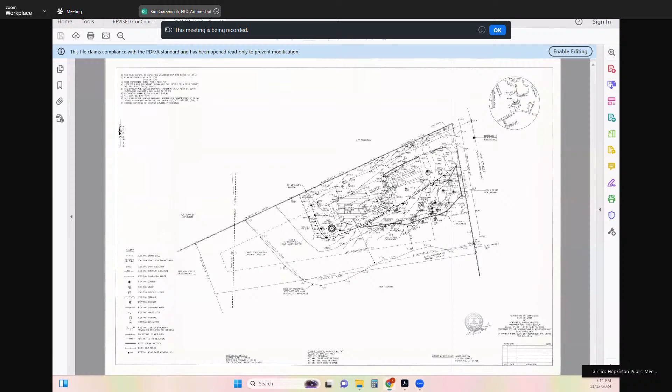Excellent. What's the process moving forward? I have to file something with the registry of deeds.

Through the chair. Yep, go ahead, Anna. So in two weeks at the next meeting, the commission will review the document, authorize signature, and then I will email you the directions. Okay, thank you. You're welcome.

Next up, we have Toll Brothers, Elmwood Farm, Newbury Glen, discussion on condition number 69.

We have someone here, oh, we have someone here from Toll Brothers. Yes, Rich Kirby from LEC is here. I believe Ted Merchant may be on the line. Ted, you still there? Maybe not. I know he had another hearing tonight. He might have had to jump off.

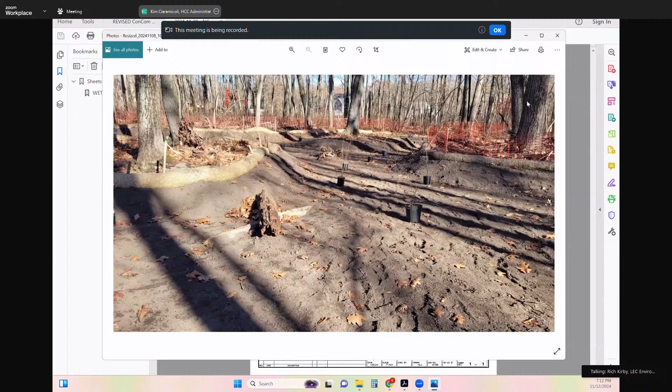Okay, so I'm Rich Kirby from LEC, and Toll Brothers hired us to oversee and monitor the installation of the wetland replication area that was approved by the commission for the Newbury Glen subdivision off of Blueberry Lane in Hopkinton. The wetland replication area was approved to be a 7,800 square foot expansion of an isolated wetland within the southern portion of the site. LEC's been working with the site contractor and the landscape contractor to get this installed this fall.

We were out there a number of times between the end of October and the first part of November to oversee the layout of the wetland replication area.

We modified it slightly to preserve some large trees that didn't quite make it onto the previous plan. Ran that by Kim in a discussion and followed up with a memo, basically just overviewing.

We're gonna keep the trees in this area and expand the replication area elsewhere. That memo talked about 3 trees, and over the course of the installation, we found 2 more that we could also preserve. I'll get into the methods briefly for a moment.

But as it turns out, we are well over the 7,800 with nearly 8,500 square feet, while preserving 5 large trees as a result of the reconfiguration. So all of this is outlined in a memorandum that I produced tonight, but basically the order of conditions and the approved plan specified that we use the soils within the wetland alteration area for the wetland replication area.

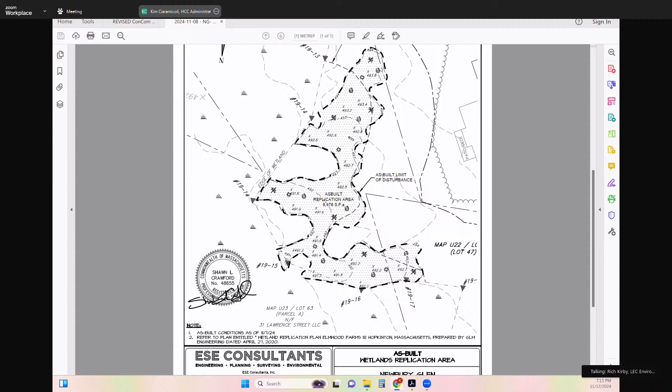The topsoil was then backfilled within the area to a depth of 12 inches, and the plants were installed.

All the plants specified on the plan were delivered. Some were a little smaller than specified, but in my experience it can be challenging to obtain native plant stock in that size. Most were pretty good, but there were arrowwood viburnums between 6 and 12 inches tall coming out of the pot, so we rejected those, and the landscape contractor got replacement shrubs that were appropriately sized.

This is a photograph of some of the staging that we did of the plants. At this point, all the plants are installed.

The buffer zone seed mixture for the access road has been installed. The only thing that remains is the wetland seed mix and some straw to stabilize the soil over the winter and early spring months. That wetland seed mix was ordered for FedEx delivery tomorrow, and the seed mix and straw will be applied tomorrow. That's my understanding, so that's where we stand.

We know the order of conditions requires that the wetland replication area be installed prior to the issuance of any building permits. We are 99% there, and we'll be 100% there tomorrow after the landscaper applies the wetland seed. That's all overviewed in a memorandum that we submitted this afternoon, and I wanted to go over it with the commission.

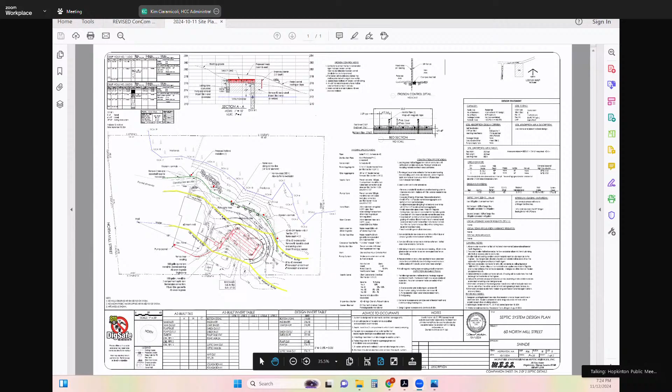All right. Dan McIntyre is here representing the homeowner. Hi, Dan. Welcome. Do you want to give us a breakdown here? So this lot was developed back in 1985. The current system is starting to surcharge to the ground and needs to be replaced.

So to orientate you, North Mill Street is over on the left-hand side. There's a well in the front yard. The existing septic system is in the backyard. There's a septic tank right here and some leaching trenches going through the backyard. We had wetlands delineated by Goddard Consulting, which takes up quite a bit of the lot over here. So just about the entire lot is within the buffer zone.

The only practical place to replace the septic system is right back where it is now. So we're proposing to take out the existing system, put in a new system, new septic tank. And because of the groundwater conditions, we're mounding the backyard up a little bit, so we're going to need a pump tank to make this all work. We're mounding this up a couple feet and grading it back down within the existing lawn area. We're proposing to limit the grading and the lawn to some large rocks here and try to take back some of the lawn area that got close to the wetlands and turn that into a no-mow area.

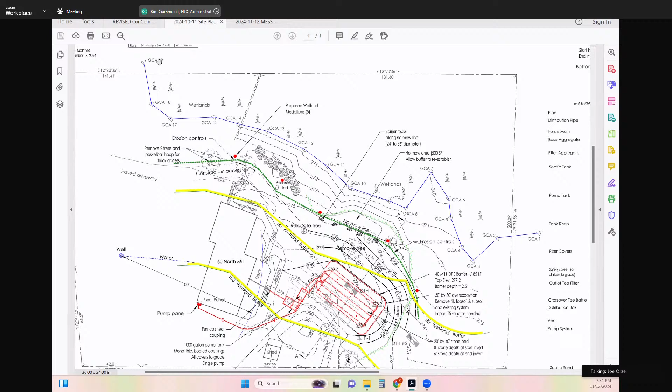Okay, I did review the delineation, didn't have any major concerns with it. As was described for the mitigation, they're proposing to allow about a 500 square foot area of existing lawn to revegetate naturally. I thought the Conservation Commission might want to discuss if some plantings would be appropriate in that area, considering that they are cutting down a couple of trees.

I had asked about any soil stockpile locations, and the response was that they don't anticipate any significant stockpiles. And other than that, no real issues.

So this is an RDA application, so we're looking to consider whether we agree this falls under an RDA. I personally like your suggestion, Joe, for replanting a couple trees in that no-mow area to establish a bit more of a buffer zone. Dan, do you know if the applicant would be amenable to that?

Well, I did talk to him. We really don't think trees are appropriate. If you look at the plan, there are still two mature trees. We've got a wetland medallion going to be attached to one of them, and there's another tree here that provides really good overstory of that no-mow area.

And if you went on site and looked at it close, it's more of a mossy area than a lawn area, so it doesn't get much sunlight in there. So I think we've got plenty of tree canopy for the wetland down there. So we don't think trees are appropriate. Okay.

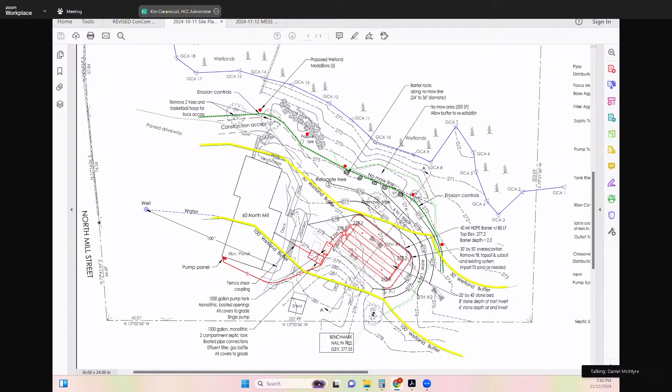All right, thank you. Through the chair, can we have a vote to continue to November 26th, please? Yes, can I get a motion for that? I'll make that motion. Can I get a second? Second. All in favor: Ed, aye. Ted, aye. Janine, aye. Matt, aye. Heather, aye. And I am an aye.

All right, next up we have Town of Hopkinton DPW, Granite Street right of way — another RDA application for wells. Let me go ahead and read this. Public hearing notice: the Hopkinton Conservation Commission will hold a public hearing on Tuesday, November 12th, 2024 at 7 p.m., virtually online, to hear all persons interested in a request for determination of applicability filed by Hopkinton DPW for exploratory geotechnical borings. Location: Granite Street right of way, between 4 Granite Street and 2 Deer Run.

All right, so do we have a representative here from DPW? Okay, members of the commission, good evening. My name is Lucas Rum of Tighe and Bond, and I'll be representing the DPW this evening.

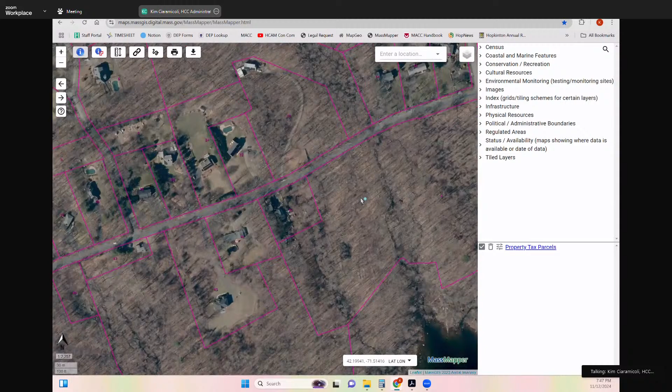This is the Milford Water Company site. So I'm just not sure what's around that's owned by the town that it could be discharged to, other than like the MS4 system, into the catch basin and the town stormwater system.

I'm wondering if it's just more appropriate to anticipate this water being released and just require something like a dirt bag, a corral and a dirt bag. I don't know if that's possible or if a vac truck is easier. It might end up that the vac truck is just the way to go, so I think maybe we'd be looking for confirmation of what you're going to use for discharge of wash water.

And like Kim said, if it's not the vac truck, then provide measures to, like Kim said, either a bag or in location. We can definitely accommodate that.

Through the chair, I'm sorry if I missed it earlier from Luke. Did we confirm whether it's 2 borings or 4 borings? I think there's some discrepancies between the application and the plan. There it is, 2 borings. So we proposed 4 locations on the plan, just so that when the crew goes to the field, they can decide the 2 best locations, but we are only conducting 2 borings. Thank you.

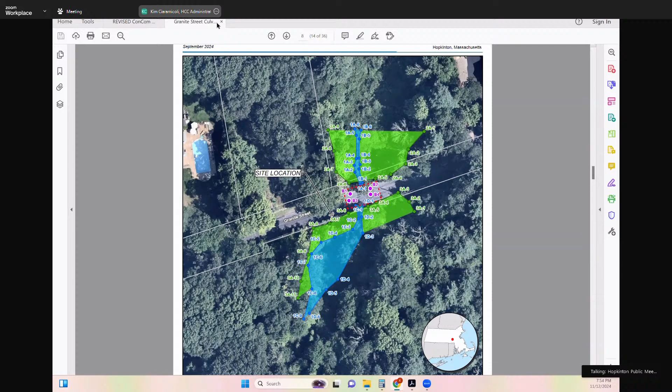All right, so we're all set on that. And moving on to our next new hearing, which is another RDA. I will go ahead and read the notice again. The Hopkinton Conservation Commission will hold a public hearing on Tuesday, November 12th, 2024 at 7 p.m. virtually online, for all persons interested in a request for determination of applicability filed by Jay Gallant to construct an accessible ramp with associated site work. Location is 71 West Main Street, Assessor Map R23, Block 80, Lot 0.

All right, do we have someone representing the applicant on the line? Yes. Great, would you like to go through the project or have Anna give a description? I could. So my name is Jay Gallant, I'm the applicant and the architect for the project, working for Mike Glatfelter, who's also here. I could walk through it if you'd like. Okay, yeah, let us know what you're looking to do.

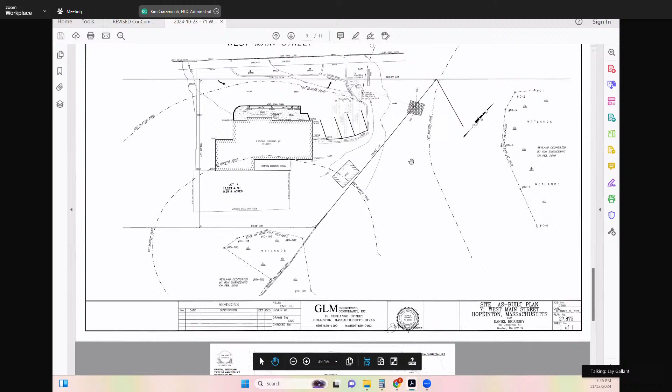Okay, so the property was a house when it was originally constructed, and it was converted to commercial use at some point. I don't know exactly when.

Clearly, it was a dry cleaner for a while because there's an awning sign that says cleaners. But it hasn't been in use for a while.

So my client, the current property owner, wants to open a bakery at the location. Basically the lower area where the awning is will be a takeout retail space, and then the rest of the building, which is higher, you can sort of see it there. It looks like it was a garage at one point where the retail space is going to be.

The majority of the house is where the kitchen itself is going to be, where the baking will be done. It's going to be a legitimate commercial kitchen, and it's about 30 inches higher in elevation than the floor level of the retail space. We're doing enough work to trigger full handicap compliance for the entire building.

There's, in the lower left-hand corner, a picture of the back of the house or the back of the building where there's a current staircase and a landing. We want to convert that into a handicap accessible ramp. The ramp would go to the right in that picture, to the corner of the building, through where the propane tanks are now, which will be relocated.

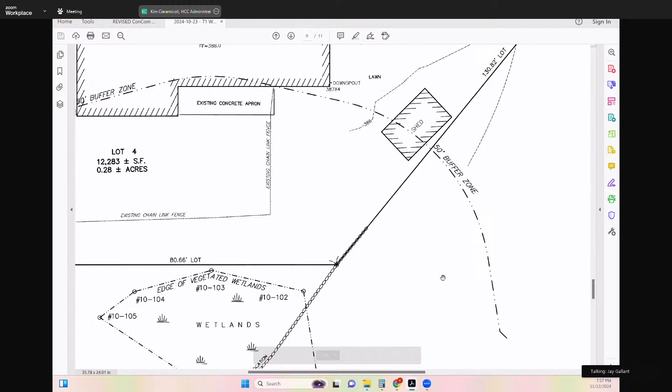And wrapping around to the parking area. So it'll help for access for any employees that may need to use it, and then also for deliveries. And it would free up the lower space, the retail space, for its highest and best use.

Unfortunately, for the construction of the ramp, there's a wetland directly behind the property, and you see the 50-foot buffer line there. The majority of the structure that we're proposing will be within that 50-foot zone. It is previously developed - you can see in the photograph, and in this drawing, that there's a concrete slab there, and we just want to essentially build on top of it.

So the pier foundation that we're proposing, the screw pile - the metal screw piles, Techno Metal Post is the most common local supplier and installer. You drill through the concrete and then drill through into the ground to set these posts, and there would be 5 of them, and then a landscape paver base and a landscape paver walkway.

So we're trying to limit the disturbance to negligible disturbance in order to create the ramp. And we're proposing straw wattle erosion control, as you can see.

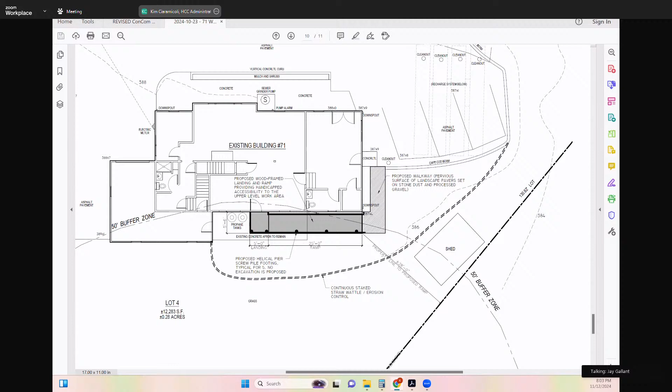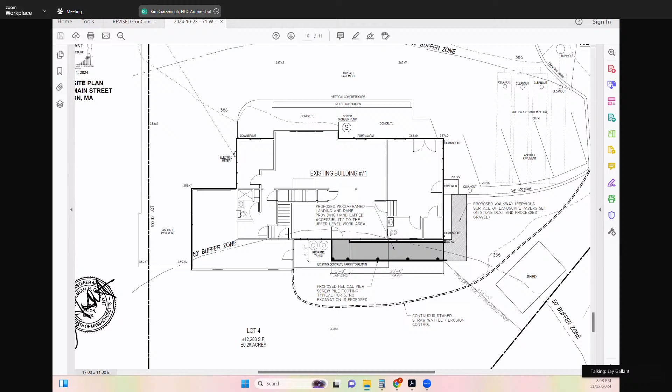Okay, I did a study and sent it over to Anna, but basically we could go around the garage, which is on the left, and still end up in the same place because we have to get access to that main area for it to be feasible. So essentially that would put us closer to the wetland because it would be along the back side of the garage. I think what we're proposing has less impact. And if it were in the front of the building, it wouldn't really make sense. We could also do inside the building, we could do some sort of lift.

So here goes the letter that I wrote. And then, we could do some sort of lift inside the building, but it kind of kills the space, as you can see. And then there's the ramp that I just mentioned, which would kind of wrap around and still end up in the same place because that's the door. But essentially you see the stairs in there. The layout of the interior of the space, the stairs take up quite a bit of space. We really don't have too many alternatives in terms of using the space differently or creating different entrances or anything like that.

And none of what we would propose would really help change the condition of having the space higher, first of all, and then the ramp that we're proposing seems to be the furthest away from the wetland and the stream and has very minimal impact. Mm-hmm. Okay.

All right, so I agree that it's a minor, seems a minimal minor impact proposal here with the piles and the ramp. I think the thing I'd like to discuss with the commission is whether this riverfront area issue would kick it into requiring a notice of intent. I believe, based on discussions I had with Anna, Kim, and Judy, that's something the commission would need to uphold and require for this project, because it is within 200 feet of the perennial stream. Again, this is the night of the gray area RDA applications, it seems like. Does anyone have thoughts on that, commission?

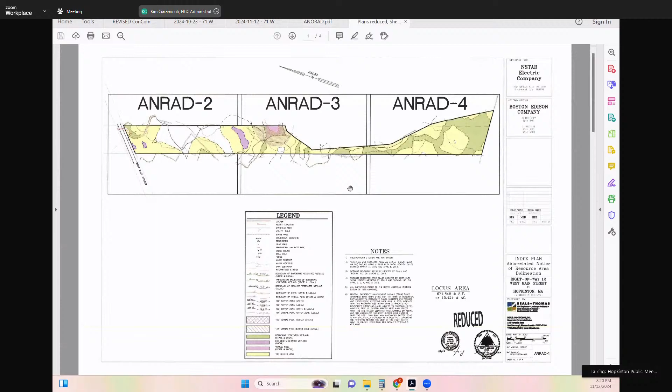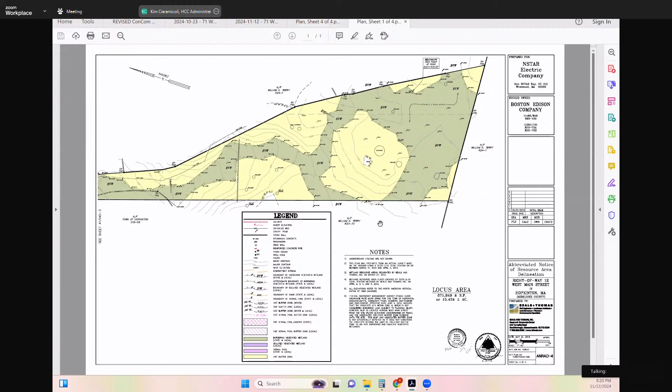If you'd like, we can hold off and continue to the next hearing if you'd like to gather a little more information. Anna's showing some documents here, it looks like, or maybe that's Kim. We might have some more information that we can go through and share. This might be an offline exercise to grab this information and then extrapolate it.

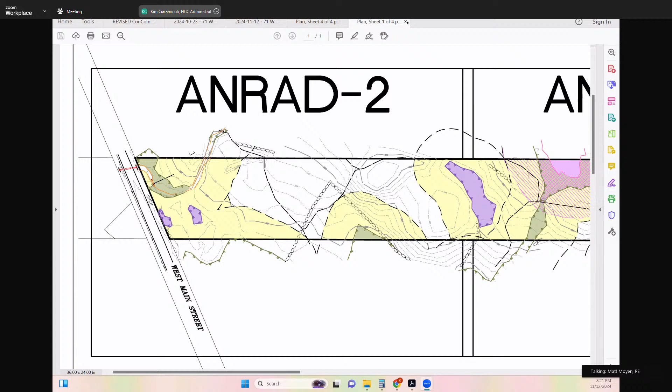Melissa, real quick question before we move on, as it relates to the alternatives and whether we would consider an RDA versus an NOI one way or the other. There was some discussion about the shed and the potential removal or replacement of the shed. That's going to be in riverfront area regardless.

So if the commission's desire is to see that shed removed as mitigation for the work and replaced with plantings, I don't know that it's an either-or depending on the alternative. I think it's either an RDA both ways or it's an NOI both ways, because you can't get out of the riverfront area unless the shed stays. Right.

So as a commission, I think we should be asking ourselves whether we think the removal of the shed as mitigation for the proposed work is more valuable than the rerouting of the walkway outside of riverfront area. Just my 2 cents.

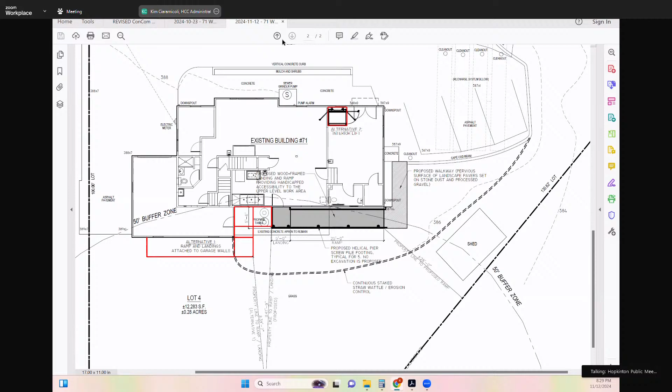Sure, I'll make that motion. I'll second. All right, all in favor: Ed, aye. Ted, Ted is an aye. Janine, aye. Matt, aye. Heather, aye. And I am also an aye.

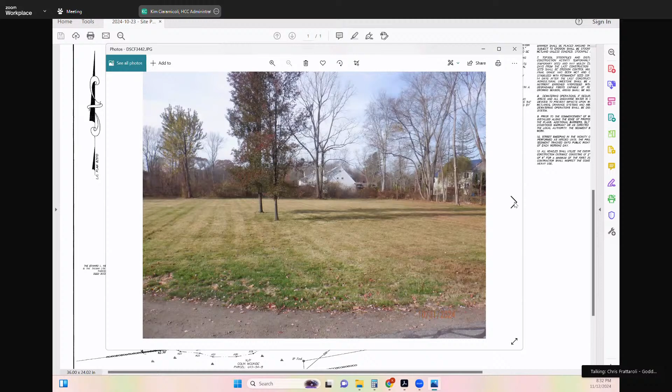Yep, those are some good photos. Thanks, Kim. On this one, would you mind going back for one moment? Just on the other side of these couple of trees here to the right-hand side of the photo, this is that bank to that intermittent stream. You might even be able to see a blue ribbon hanging there.

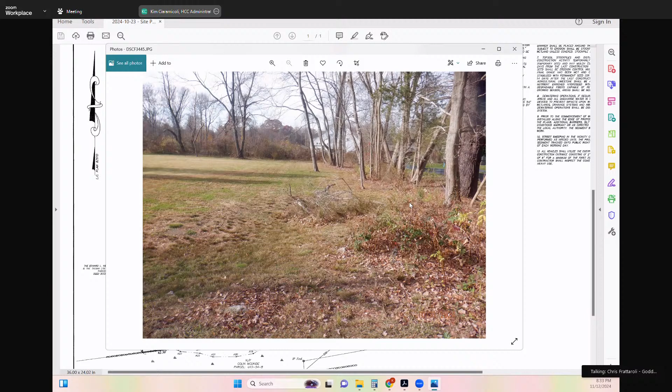So in any event, as we move along here, we'll get to proposed conditions on the site. But essentially, while we're here, we do have this paved driveway that terminates slightly before the existing house and then expands out into sort of a hard packed gravel area as an extension of that Maple Street extension. And there's that stream.

Thank you. So our proposed work consists of dividing this lot into two and constructing a new single-family house on the northern of the two lots. Because we are essentially encircled by resource areas, the entire site is within the commission's jurisdiction. That buffer zone you see is the 50-foot, and the entire center of that 50-foot line would be the 50 to 100-foot buffer zone line. We are well aware that we are proposing work very near a resource area and well within the 50-foot buffer zone.

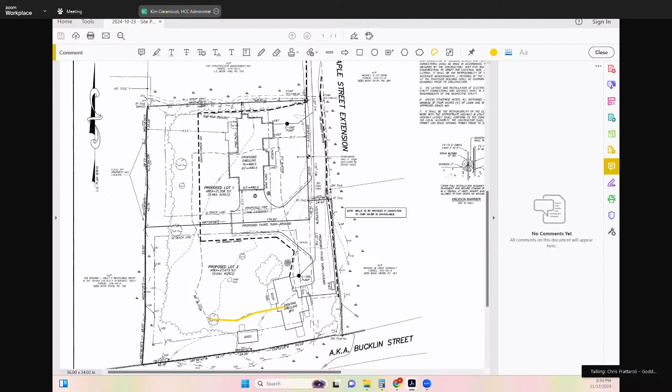We are proposing the construction of this house over entirely existing lawn. I believe there are 2 or 3 trees - yeah, that's a good annotation there, thank you - kind of in the center of the lawn that will have to come down for the proposed house, but otherwise we are entirely within existing lawn.

We're also proposing this paved turnaround, being that this is the end of Maple Street Extension. We're dead ending here. We do need a fairly substantial turnaround for fire access, namely. So the existing gravel area will be paved over and updated, as well as a fire lane easement that will essentially split the two proposed lots to allow fire access and fire turnaround in that area.

Beyond that, we do have erosion control barriers proposed all around. Due to the pavement, we do have them over here on the eastern property boundary as well, and then around the proposed house.

As mitigation for our encroachment into the 50-foot buffer zone here, we're proposing a pretty substantial mitigation planting area, both along the northern property boundary between the house and that stream bank, as well as along the western property boundary of proposed lot 1 there. We're going to be planting about 4,300 square feet with native vegetation. We're going to be removing the lawn, seeding it with a nice conservation wildlife mix, and installing a nice mix of shrubs and trees in that area. We think that serves to protect the interests of the act and the bylaw by providing wildlife habitat value and providing attenuation of pollutants. I think we are going to scroll down to that planting plan right here.

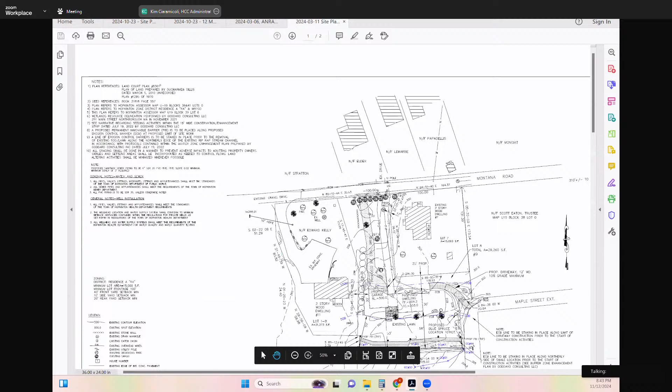So that's something I would just point to. Yep, there we go. I would expect us to uphold the same requirement for the neighbor here.

So if you could take a look at that when you're considering relocation of the house or any tweaks you're going to make to the plan, just look at what we had them do. I know the house right now is within 12 feet, so it certainly is encroaching more than what we allowed on this adjacent site.

Yeah, and with that being said, the owner is splitting the property, correct? So it's correct - self-imposed hardships on any development here. Just remind the commission of that and the applicant. Those are my thoughts in addition to everything Joe said, which obviously needs a little attention on this plan.

Does anyone else on the commission want to share some thoughts looking at this? To the chair, this is Ed. My first thought would be to move the house to the south, which would get more of the house out of the buffer zone. As it stands right now, I'm not terribly impressed.

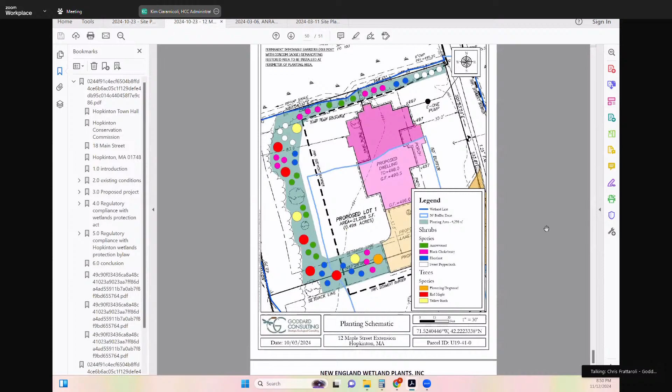So the first alternative that we considered, obviously, is no change to existing - we end up with no house being built and the site remains essentially entirely as lawn. The road and driveway remains unimproved and we lack essentially a fire turnaround there. We also contemplated relocation of the proposed house to be further outside of the 50-foot buffer zone. It really constrains our ability to create that paved turnaround that the fire department's looking for, and it essentially remains as that kind of unimproved hard packed gravel.

That may also result in a reduction in the plantings proposed, and lesser tree canopy being installed, and habitat value and buffer effectiveness as well on that front. There's also a paper street here laid out as Bucklin Street that's shown.

And then our fourth alternative we contemplated is that current proposed design that you see in front of you. We do construct a single family home. We're able to install that fire department turnaround that they're looking for. We convert about 4,300 square feet of lawn into naturalized area, and that serves to better protect the wetland resources than simply having lawn in those areas.

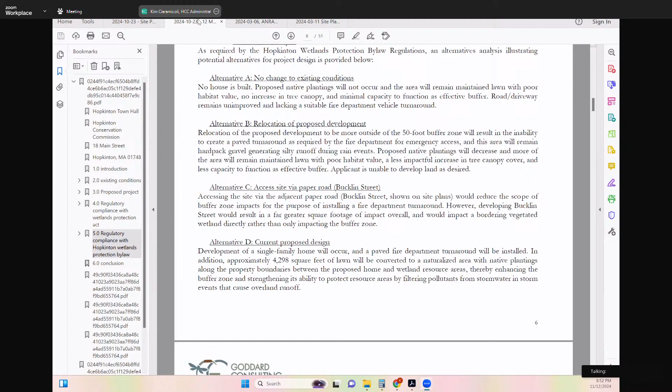So I think you've obviously got Joe's comments to address, and you've gotten a lot of feedback from the board tonight. So you can take that and come back to us. You want to continue out a little farther than the next meeting, or do you think you'll have progress in the next 2 weeks? We've already kind of had the benefit of talking about this for a few days now. Let's continue out to 2 weeks from now, and if we need a little more time, I'll reach out to the staff.

Does anyone else have any last minute thoughts, or anyone from the audience before we continue? I don't see any hands or anything. Okay, can I get a motion from someone on the commission to continue this out to the next hearing? So moved. Second.

All in favor: Ed, aye. Ted, that is an aye. Janine, aye. Matt, aye. Heather, aye. And I am also an aye.

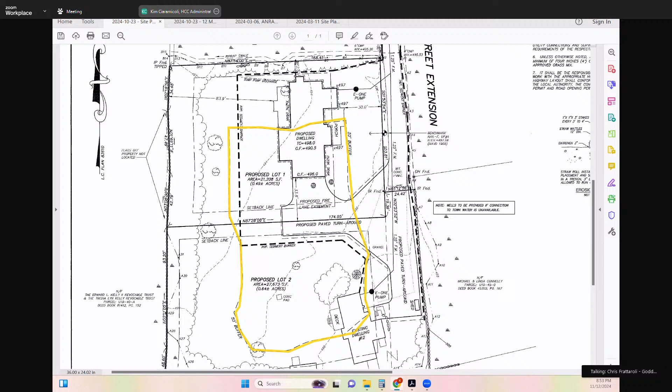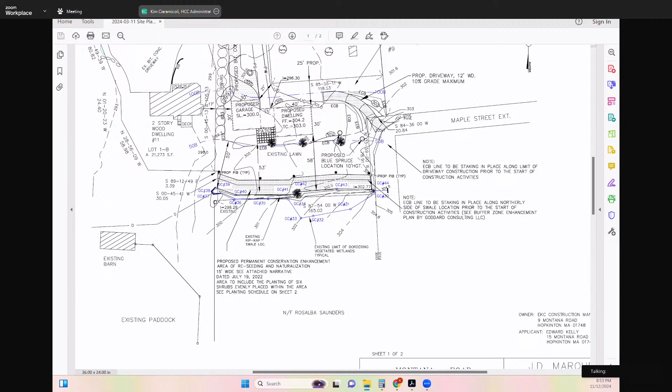All right. Hang on, I lost the agenda. There we go. Yeah, I did too. Sorry about that, I lost it. Okay, thanks, Kim.

All right, so that finished up our new hearings. Continued hearings: 150 Fruit Street, notice of intent continuation. Did we have anything come in for this one? I didn't see anything in the file. Through the chair, we did, late this afternoon. It was forwarded to Lucas, but I do not believe Joe had time to review it, and I barely got to look at it. And I don't think Kim or Judy got to look at it either. Yeah, okay. Is anyone on the call for this application?

Chris Frattaroli with Goddard Consulting. Okay, hi Chris. Hey there. Do you want to run through what you presented? I'm not sure how much we'll be able to do with it, getting it at the last minute, but you can go ahead and present your changes. Not a problem. Through the chair, yes, Kim. Chris, do you mind grabbing the screen?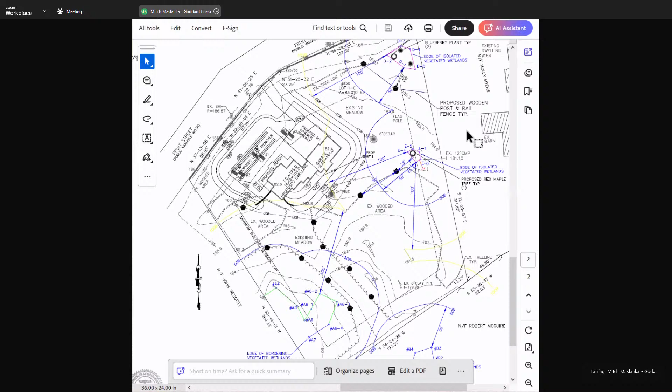I don't even think that I'm trying to pull up your documents, but I don't think I have them ready. Not a problem. Yep, I should be able to share, looks like. Okay, all right. So last time we were with the commission a couple weeks ago, actually, can you guys see my screen?

Yes, all right great. So last time we were with the commission a couple of weeks ago, we had a few items to add to the site plans for the commission to be ready to approve the proposed single family house. So I'll walk through those couple of revisions, very minor ones. So we have this D series wetland over here. Are you able to see my cursor?

Yes, okay great. So yep, this is the D series isolated vegetated wetland. So there was much conversation at the last hearing about this area. The commission agreed to condition that this D series wetland would have stumps and woody debris removed from the area, and that we would show on the plans proposed tree plantings in here. So we've got one red maple tree and two high bush blueberry shrubs, and that area will be restored back to a nice natural isolated vegetative wetland.

And then 25 feet off of that wetland, a post and rail wooden fence was proposed here at the 25-foot buffer zone line, so that this area could be protected. And we have PIBs shown as these small pentagons. So we've got two PIBs there with the post and rail fence.

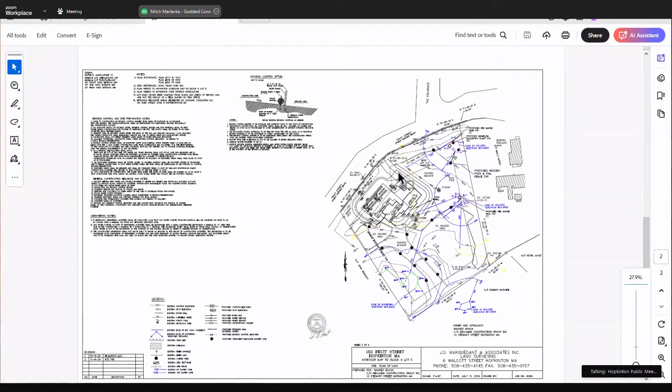Thank you. Okay, so I think we're gonna continue this out. Mitch, that's agreeable with you to the next hearing? So I guess I just want some clarification, is there anything that's missing from the site plans?

I guess I would say and echo what the other commissioners said, that nothing jumps out at the moment, but we really haven't had a chance to give it a good look and look through all the material to confirm that. Otherwise we would be voting on it.

Yeah, well, do you guys have notes of the previous hearing to maybe run through real quick? Through the chair, yes, if I may add to what you're saying: it's an unreasonable ask of the commission, Mitch, for you guys to submit something a few hours before our public meeting and then expect us to make a decision on the NOI. So to be blunt, if you want us to vote, it's not tonight. Tonight's not the night I would do that.

No, that's totally fine and understandable. I just don't want to be missing anything if there's something you guys have in your notes from last time. I'm sure if there's something that comes up when the staff reviews it, then they will let you know in advance of the next meeting. Okay.

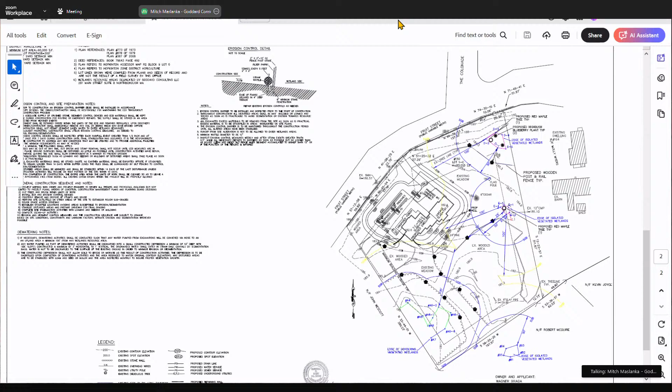Next up, we have Mauro, 88 Frankland Road, request for certificate of compliance. Anna, do you have a download on this one?

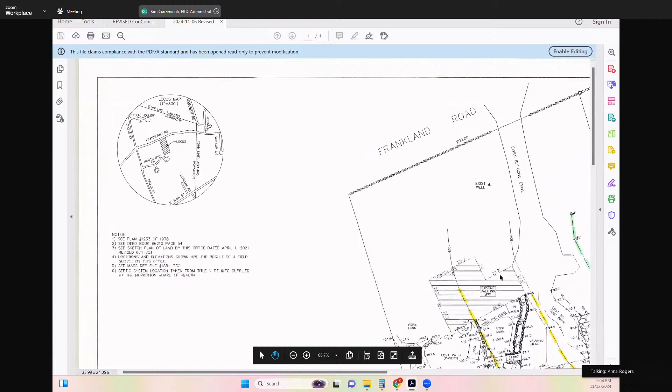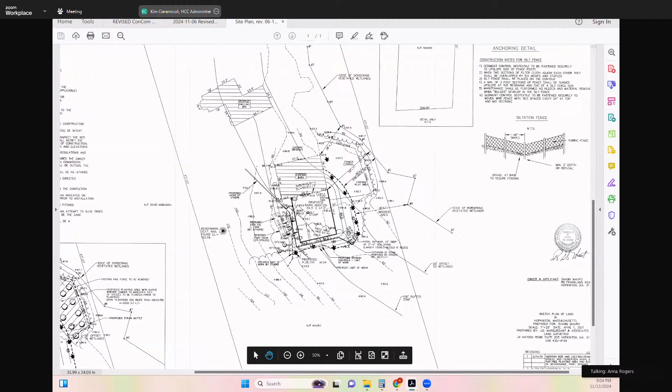Absolutely, through the chair. 88 Frankland Road was the construction of an addition to the existing barn on the property. Part of that order of conditions required just over 2,000 square feet of mitigation area, and the order specifies talking about survival and monitoring of the plantings. When the as-built was submitted, it was about only 1,000 square feet of mitigation. Lucas did review it and provided feedback to the applicant, who has increased the size of the mitigation area.

A square footage has not been confirmed on the site plan, and it does appear that all the plantings were just recently done. So we don't know if they are going to survive over the winter this year, and I have not gotten a chance to get out there and do a measurement of that proposed mitigation area. So the applicant did request to speak with the commission and has requested the certificate of compliance, but I don't feel that they're quite ready. But obviously it is up to you guys as the commission.

Okay, thanks Anna. So do we have someone, the applicant, on the call? Do they want to speak? Yes, I'm here. Also, I don't know if Dave Marquedant's on the call as well. Dave, you there? I am here, yep. Okay great. So Dave, do you want to kick it off or do you want me to?

The area to the east, to the right of the barn area, was just recently replanted. We had 12 plants that weren't native. Shawn aborted that and has recently replanted native plants, a total of 13 in that particular area. We have a row of PIBs, rocks, a row of rocks between the plantings and the barn. And we've also installed 2 posts with medallions closer to the walkway.

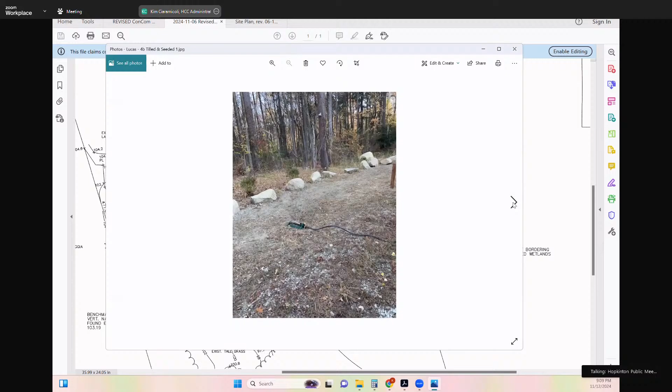So Anna, as you mentioned, you haven't been out on site. Joe has been on, but we haven't had anyone on site to actually confirm and look at this since it's been completed, correct? Correct, the applicant supplied some pictures, but we have not had a chance to get back out on site yet. Yeah, okay, I think in my opinion, I wouldn't be ready to sign off on the certificate of compliance until we have someone out there take a look and give enough time that the plantings can establish themselves and we can feel comfortable with them surviving. Who knows what the weather's going to do in the next couple months, but that's my thought.

Does anyone else have thoughts on the commission? Yeah Melissa, I just have a question or thought. I agree that we need to wait to make sure that the plantings take and live, but if they do, are we at the right square footage now for mitigation? It sounded like we came up short initially. Or do we not know for sure what our square footage is? I think that's something we would be looking for Anna to confirm in the field. So that's a question mark as well, whether the plants live and whether we're at the right amount of mitigation.

Yeah Ted, so what I did was, the hardscape guy again I guess just didn't follow the plan exactly to spec, and installed large stones, greater than 2 by 2, which you can see along the perimeter. That wasn't tight enough to the building, lessening the square footage area. So what I did to increase that is installed myself cedar posts, 4x4s, with the Hopkinton Conservation Wetland medallions, so that I could meet the square footage as close as I could.

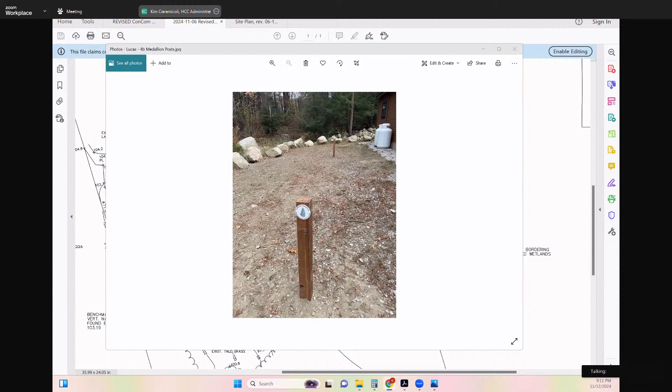Okay, but then it's a seed mix between those posts and the stones? Correct, that is right. Okay, all right. Anna or Kim, can you pull up the original plan that showed the locations of the PIBs?

The little stars are like the PIBs. So really on the final plan, the as-built plan, it shouldn't be the stones that are labeled as PIB, I think, if you go back again. The PIB, we don't want that to be the existing line of boulders. We want it to be the stakes. Well, so really it's a combination. So I followed the form, WPA form 5, item 59, and used a combination, I guess, for the revision, of the large stones and the cedar posts with the medallions.

I think, Dave, we might need something to clarify that on the plan, so when it's recorded and the next person who wants to do something here or is looking at what that PIB line is, it's clear.

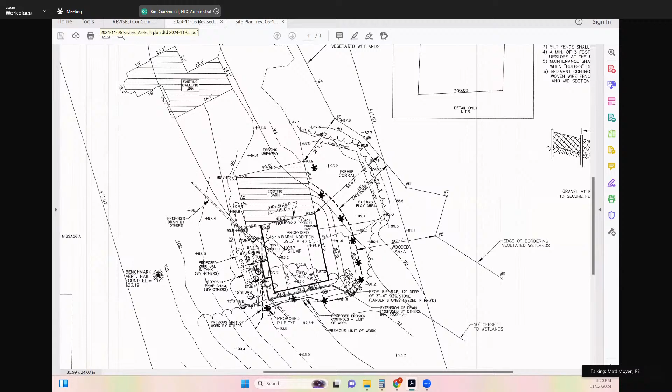Gotcha, okay. I apologize if I missed that earlier, I was trying to play catch up. I'm not familiar with this particular property, but if I'm reading this correctly, in the north-south direction, the first five stones starting from the southern end look like they fall in line with the PIB locations on the approved plan. What should have happened was they followed that 50-foot buffer line to the corner of the building, then came straight north on that blue line Kim has drawn on the plan sheet. I'm just looking at it from the perspective that you've been overly conservative with one of those markers, and I don't want a homeowner to have to give up additional yard area that wasn't part of the original approval, right?

I don't know if you're following me, Kim, if you can draw this out. Yes, thank you, I think you kind of did. So that area on the southern half where you've got that PIB stake, you've actually given up some of that lawn area that was approved as lawn. I would hate to see you give it up, right? So if you're going to move these boulders back, which it sounds like you're open to doing, I would suggest doing so in a manner that's consistent with the original approved plan, to both meet the commission's expectations and to maximize your area of lawn that was approved through the process.

Understood, yeah. And if anything, I just want to be on the more conservative side, just because I'm trying to be as consistent as I can to the plan. If anything, I'd rather be on the more conservative side than anything.

Okay. Any further questions? Does that make sense? Are we on the same page, you think? Yeah, I mean, so I guess from my perspective, my job is just to make sure that these shrubs survive the winter.

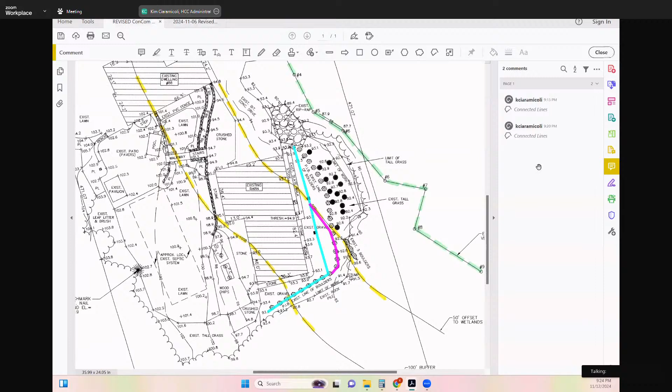Through the chair, I'm happy to speak on 34 Downey Street. So 34 Downey Street was an after the fact notice of intent for a dock and a boat lift on Lake Maspenock.

The applicant has obtained the Chapter 91 approval as required in the order. When the applicant applied for the certificate of compliance, they did not include the required plan with the PE or PLS stamp, stating that it was after the fact and nothing had changed. So I did advise the applicant they can request a waiver of that condition from the commission if the commission so chooses.

So they have requested that waiver. Lucas Environmental did go out and do a site visit, noting that the site is stable, but without that PE or PLS stamp and statement, they can't verify whether or not anything has changed since the original dock and boat lift was put in. Lucas also noted that there's no required signage of the public passage as part of the Chapter 91 approval, although that is not part of the commission's approval. So at this point, I think the commission needs to decide whether the PE or PLS statement is required, or if this meets the commission's approval to issue the certificate.

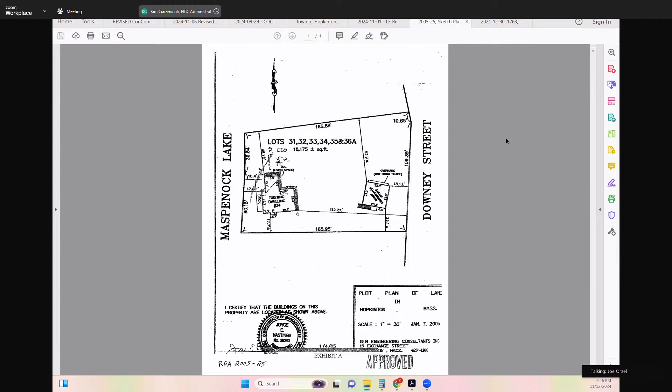Okay, so Joe, you were out there? Did you take... Actually, it was Devin who was out on this site. I did not view the site myself.

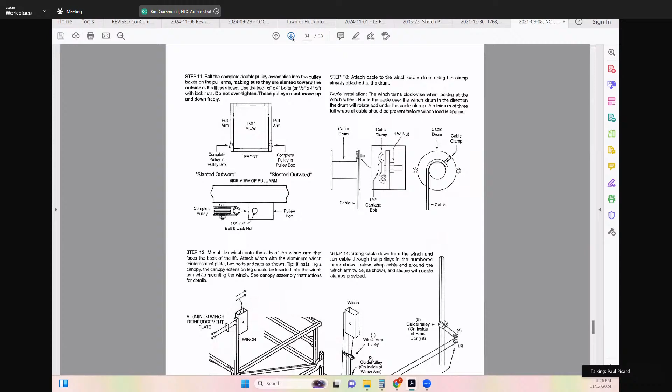All right, and we have the applicant here on the line. Is that correct? That's correct. Hi, Paul Picard. Thanks for hanging in here with us for the long haul. Did you have anything to add to what Anna outlined?

I just wanted to clarify that the NOI was not for the dock. The dock has been existing for 50 years or so, well before I was here. It was only the addition of the boat lift. The Chapter 91, though, did include the boat lift, the dock, and all the retaining walls.

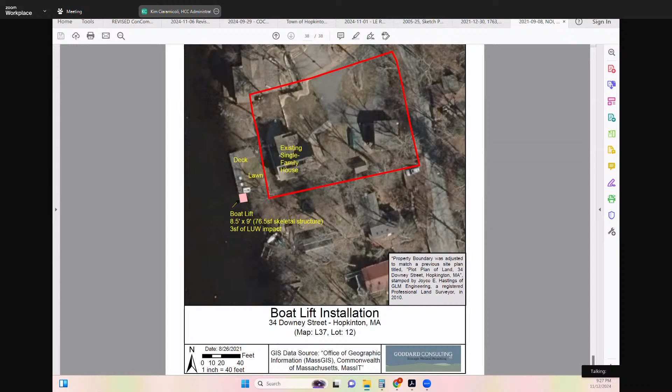So what the stamp was supposed to be for was that the dock didn't change. Is that right, Anna? The boat lift. Okay.

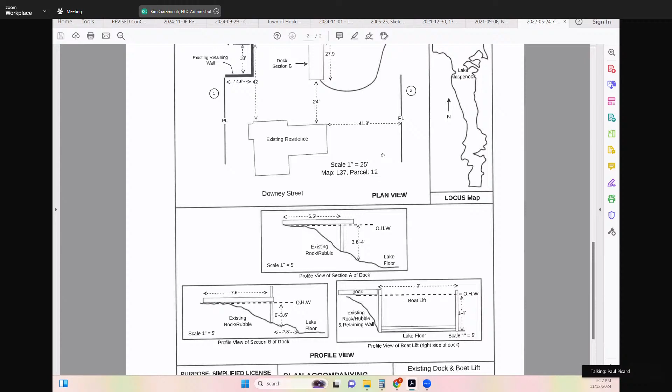Through the chair, if I can speak on the location of the boat lift. Because this was after the fact, we had a survey as part of the commission's request when we were at the NOI. So we had a land survey which located it. It hasn't moved. It's adjacent to a wall that's been there since the 1950s or so, next to the dock. So at this point, to incur a cost just to say it hasn't moved seems unnecessary.

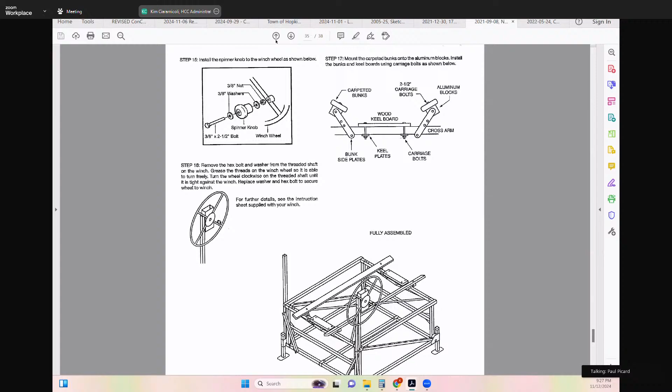In addition, this isn't secured to the ground anyway. It's just placed on the bottom of the lake. Okay, yeah, that seems reasonable to me to issue that waiver, that it hasn't moved.

And so you are aware of the Chapter 91 access sign requirement? That's not under our purview, but yeah, I do need to get one made up. I thought it came with the permit, but it didn't, and then I honestly just forgot about it. Okay, we'll take care of that.

Does anyone on the commission have any thoughts or concerns with issuing a waiver for that PLS requirement? Hearing no concerns, I think we'll go ahead and ask for a motion to issue the waiver as requested.

Can I get that motion? I'll make that motion. Thanks, Ted. Can I get a second? Through the chair, do you want to amend that motion and also issue a certificate of compliance? Yes, good idea, Anna, that's exactly what I want to do. Does anyone want to second that? This is Ed, second.

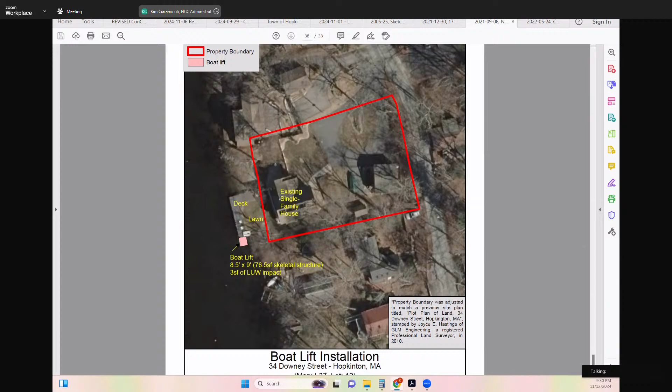We can all officially welcome Judy, today was her first day. Hi, Judy. Longest first day ever, Judy. Seriously, learned a lot today. Good, hopefully you didn't get too overwhelmed, and you can spend the next couple weeks recovering before you're running a meeting for us.

But you have Anna, so it'll be fine. And I would just want to say hi, Heather, I didn't get to say hi last meeting. Welcome. Oh hi, that's right, you weren't here on our first one, were you, Janine?

Okay, and Kim, we get to say thank you for coming to another meeting. Bonus encore by Kim. Absolutely. But guys, this is really, really my last one. We've heard that before. No, like seriously.